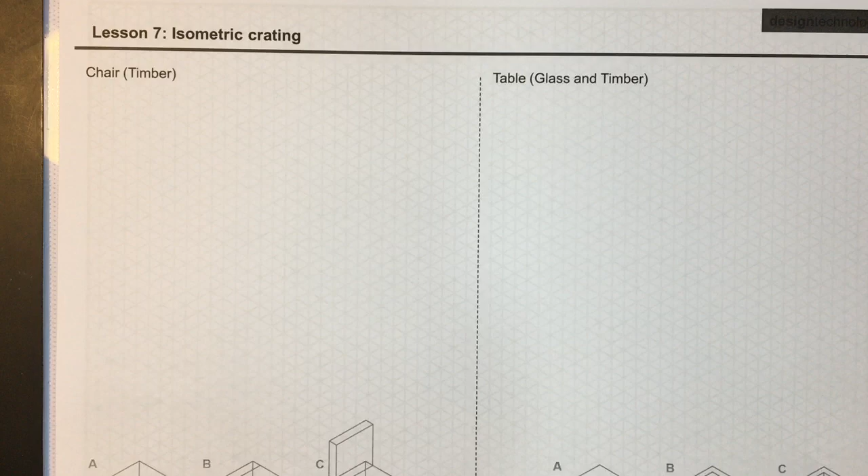Don't draw it too high up. Remember, you can do this on any paper if you haven't got your booklet. You should have some grid paper in your subject knowledge organizer, or alternatively you've got your booklet, or you can use the set square. The first video of this playlist will show you how to either make a set square or use a set square.

So off the just above this sequential diagram, I'm just going to pick my lowest point. That's going to be this point of the drawing, which is this bit here. I'm going to put that there.

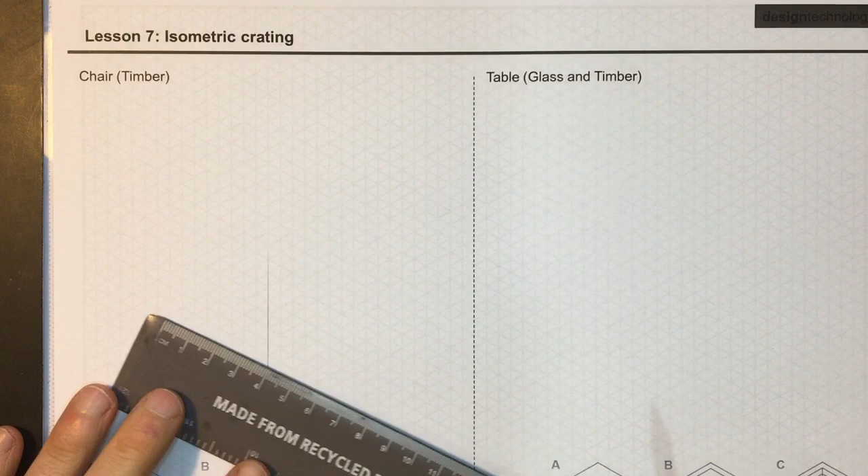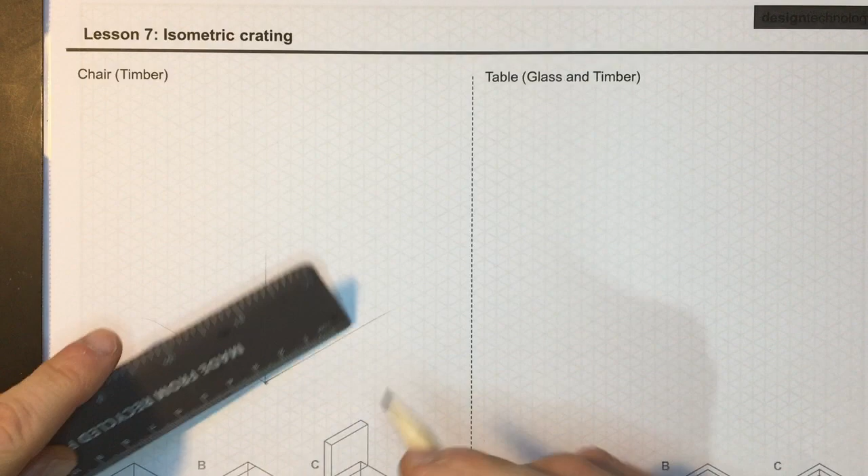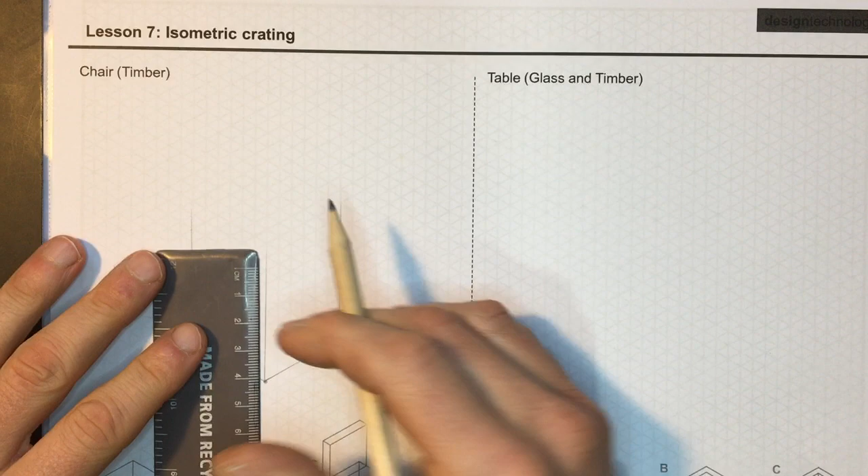So we're going to draw a vertical line up from here and a vertical line up from here. Then I'm going to pick the height of my chair. Rather than making it more of a hexagon, I'm going to go with 4 centimeters up.

I'm going to go 30 degrees to the left, and I'm going to go 30 degrees to the right. I'm going to then bring it back at 30 degrees, just turn that off, there we go, and then 30 degrees this way. Now once you've done that, you can then choose where you want the back of the chair to go.

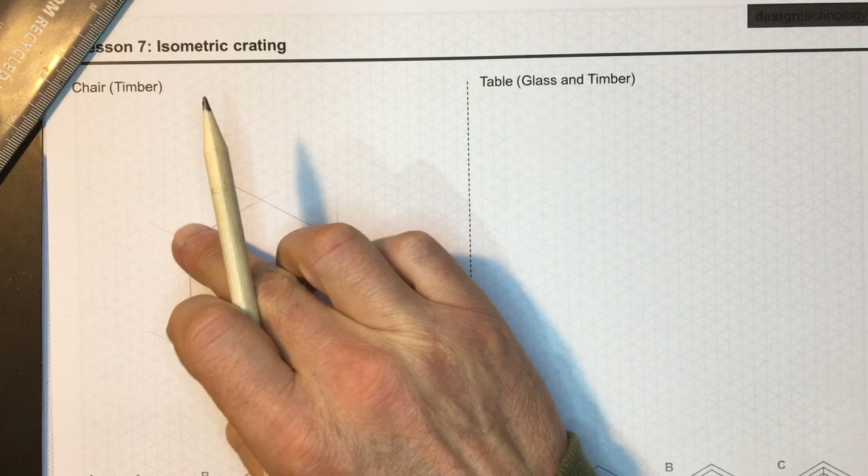So I could put it on this back section here, or I could put it on this part. Just be careful, because sometimes we get some students, if this is a side view of your chair, putting the back of the chair actually hanging off the back. They draw it here, so it's kind of projecting over, a bit like when we did with the bin.

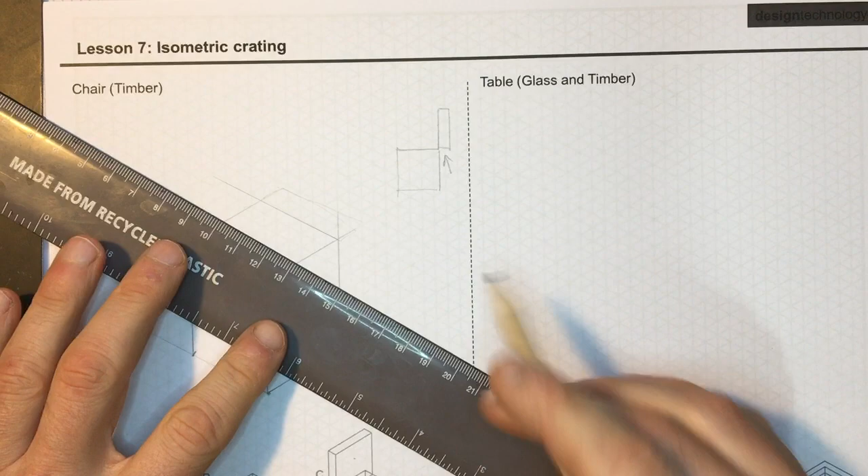So you want to draw a 30-degree line somewhere on top of this cuboid or this crate. I'm going to draw it here. Actually, I'm going to do it thinner, 1 square in, 30-degree line there.

And then each of the 4 corners of this, we're going to send them up. So we've got 1, 2, 3, 4. And then we need to decide upon the height. I'm running out of space now at the top, so I need to pick the height.

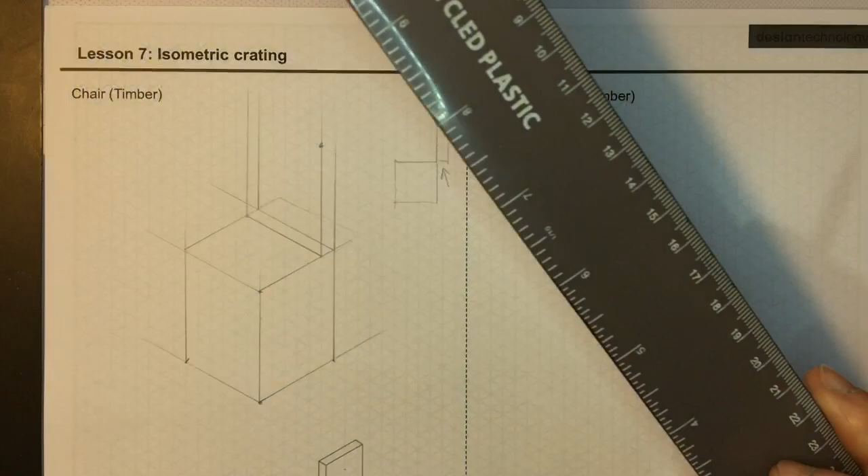And I'm going to send it at 30 degrees to the left, 30 degrees to the right, 30 degrees back on itself, and then 30 degrees again over here.

Okay, so what we then need to do is we need to decide where you're going to sit. So on this part, I've got a 30-degree line here and a 30-degree line across here.

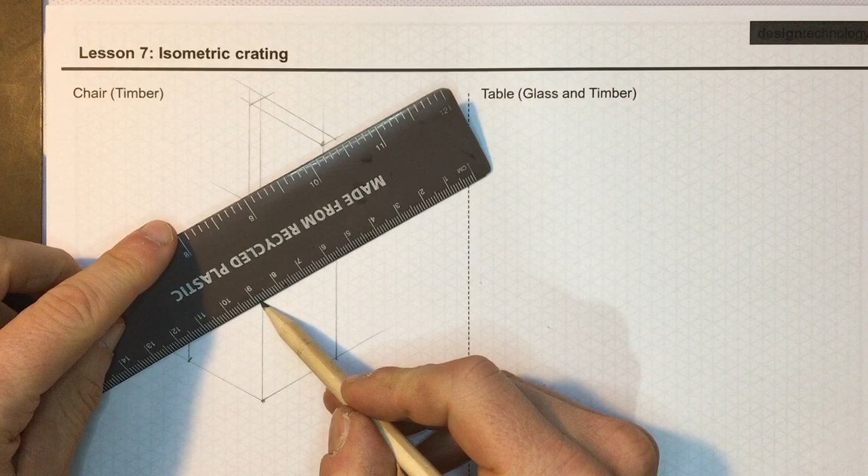And then what we then want to do is we're going to put the legs in. So the front legs here is going to be vertical and vertical. This one's vertical, and then we've got another vertical on this side. Now we'd want these to be 3D.

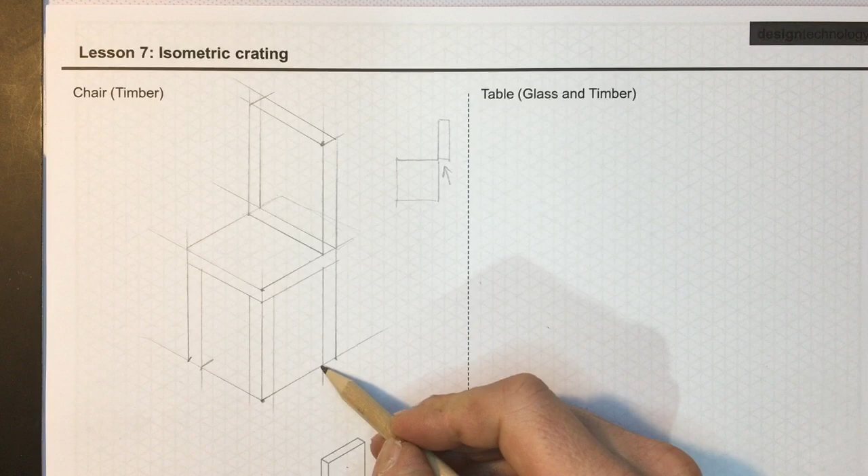At the moment we can't see the front of this leg and we can't see the side of this leg. So at this corner here I'm going to bring it in at 30 degrees. This one I'm going to bring in at 30 degrees, the same width, and send that one vertically upwards, and send that one vertically upwards. Now what we've got is the 4th leg somewhere behind it.

Because we made this measurement here and measurement A and B the same, the 4th leg is hidden behind. So if you do it more rectangular, you'll end up seeing the leg, which is similar to the table.

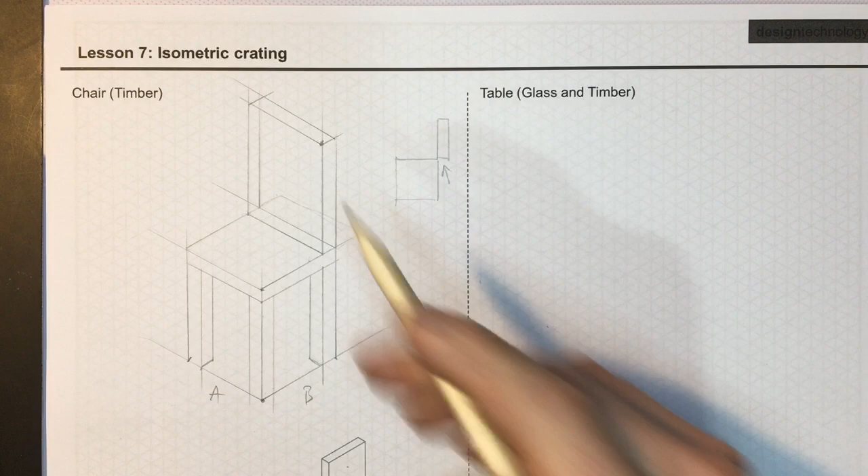You can then, on each of these 4 corners, send them up to draw something like a cushion on the top here. I'll borrow that line there. So we've now got a cushion on the top.

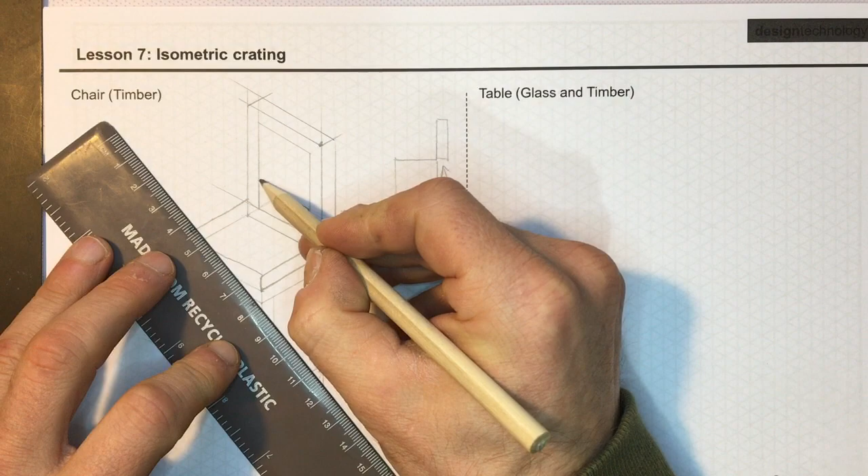If you want to, you can open the back of the chair up, just like we did in the first lesson where we did open sides. So we should be able to see this back corner here with a vertical and 30-degree line like that.

For those of you who are grasping this really quickly, you can put a tie if you want, which connects each of the legs all the way around. It's not essential, you don't have to do this, but here's one tie. So we've got a 30-degree line here and a 30-degree line here.

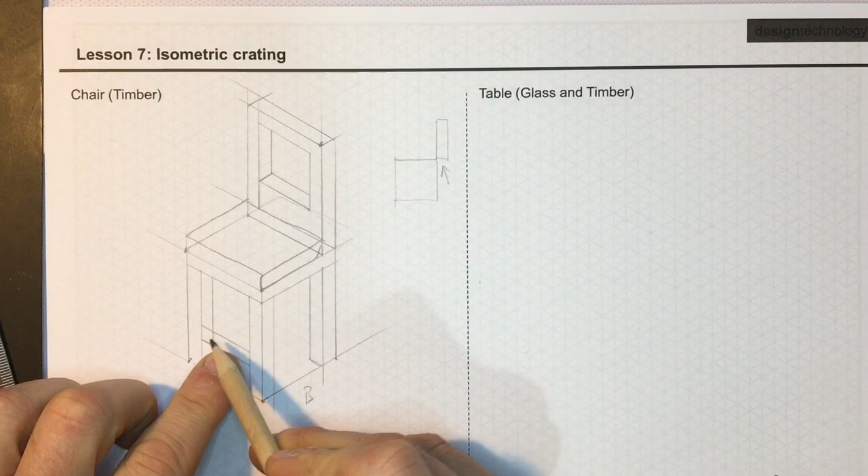This is the front of the tie. I just need to draw the top of the tie with a 30-degree line and another 30-degree line. If I'd like that tie, which connects the 2 legs together, to run all the way around, I've got to use isometric projection where I project that line onto there, change direction, and it goes across to there. This one comes down, changes direction, and then goes the other way at 30 degrees.

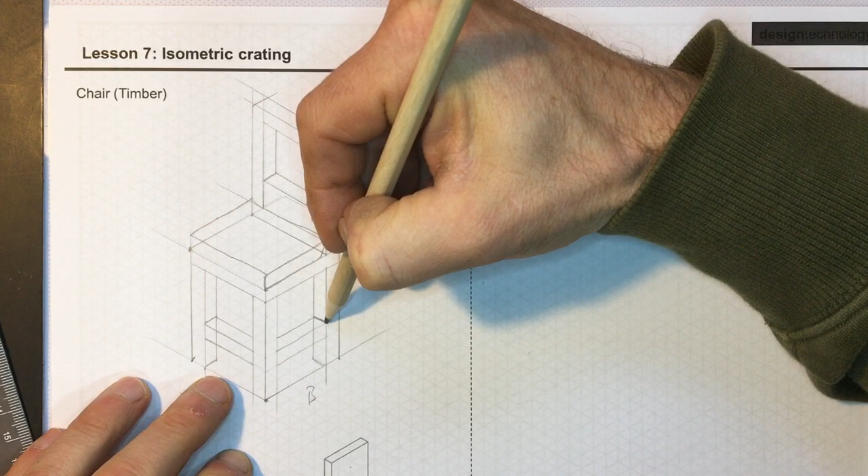I can then draw the top of that tie on. I'm going to use that top section there just by continuing that line on, which would be the corner of the back tie. All I need now is a 30-degree line above that and a 30-degree line below that.

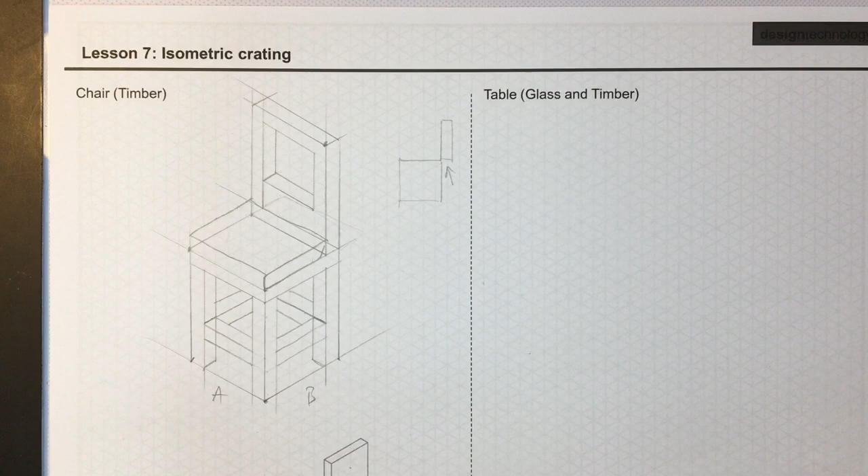The same on this side, this line here, I'm going to continue that along at 30 degrees, and I just need a 30-degree line above and one below. It does start to get a bit more complicated on the inside there once you've got those. When you've done that, you can have a go then.

I'll do the finish on the next video clip, but the table is very similar, but this time because we've got a rectangular form, you'd have to judge where the leg's going to go, particularly if you decide to put a glass worktop on top. So this is going to be the tabletop. Again, we've got the leg, the front leg, we've got the side leg on this side, and we've got the back leg here.

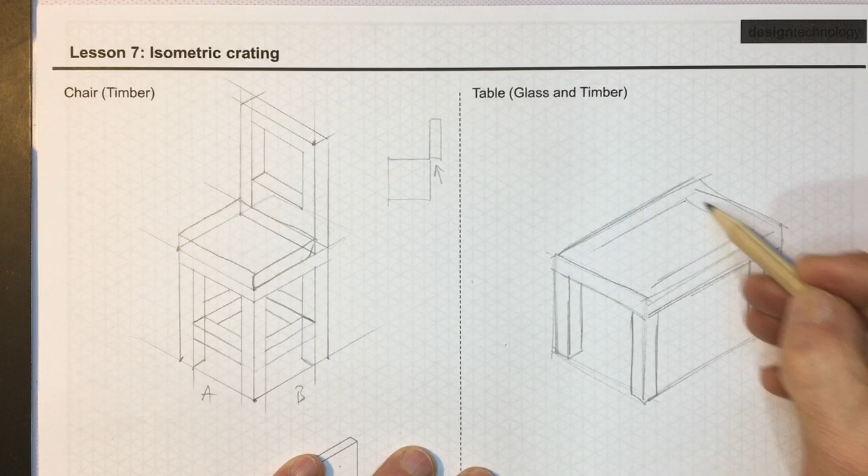What we then need to do, if you were to open this up and say, I would like this to be a glass top surface so you can see through it, you would have to use this leg to project that along at 30 degrees. Use the bottom of this leg at 30 degrees, and then this is where your other leg would start, so you project that down, so where they meet would be the bottom.

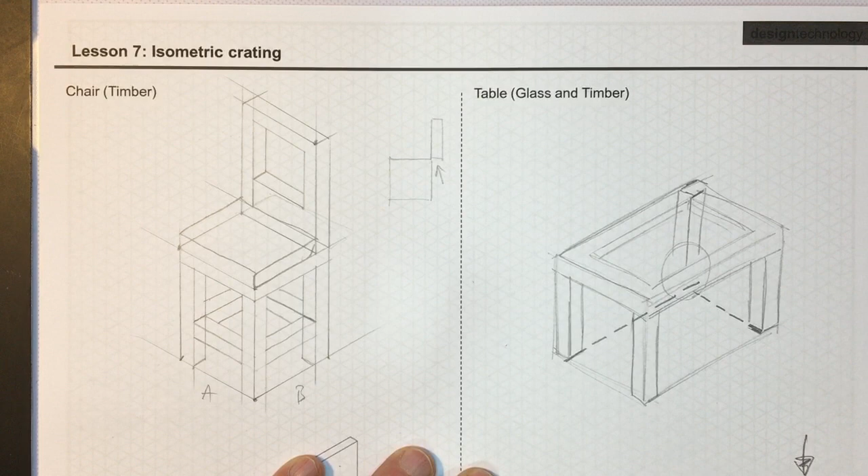There's actually an error in the sequential diagram at the bottom. They don't match up, they should do at the bottom there. So this is the focus task, this is the extension task. I'll show you how to apply a finish using finishing lines and rendering on the next video clip.